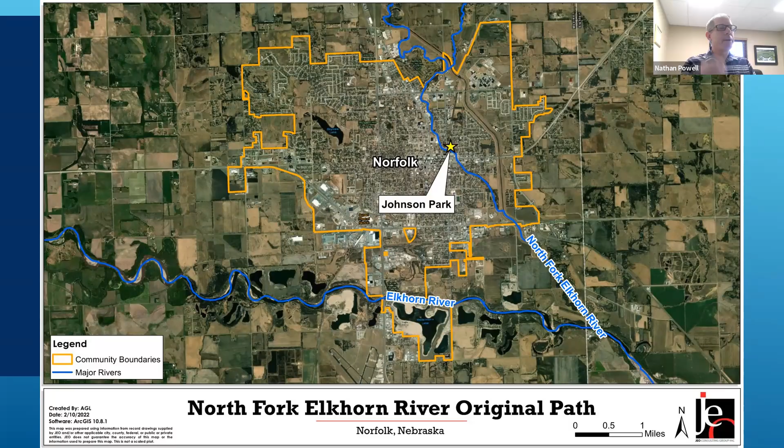The next slide actually shows you what that looks like. There's a little river dam for the grain mill, and they had the diversion mill as well, where they had a little shop and post office. Then the oxbow developed into Johnson Park over time.

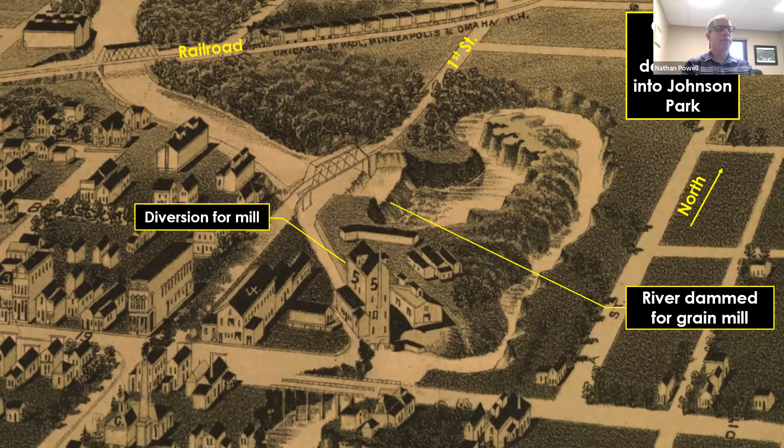In the 40s, after the development of the park, we did see flooding in 1944 and again in 1962, where water spread a mile and a half wide. In 1962, we had 90 city blocks flooded. So from that, we started working on flood control, and this occurred in the 1960s.

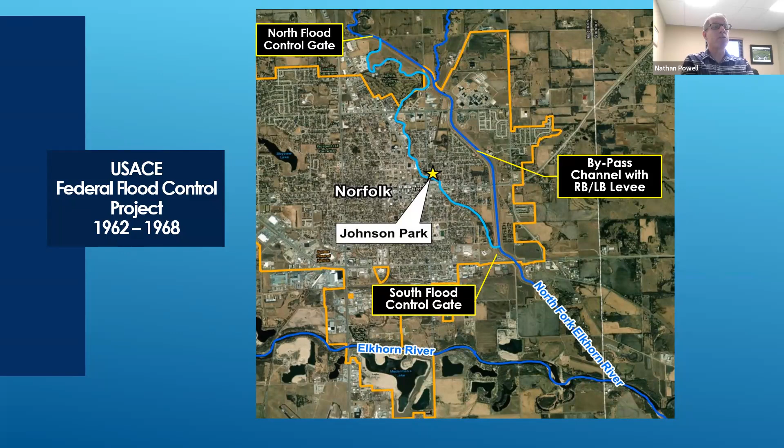We had a flood channel installed in the 1960s. There was a north flood gate control to allow water to still flow through town, and a control gate on the south end to keep water from backing into the community. So we maintain the water flow through town, and when it gets above flood stage, we divert that water. That's what made this possible for the Whitewater Park - because we control the water flow going through town, it really helps us control the recreation aspects of the Whitewater Park.

So we can look at some previous site conditions. These are right before construction. Over the years, this is what developed - the river did end there right at First Street. The river continued, but that's where the river trail ended. People would get off there and float down in an inner tube, but that's where it would stop. There were no whitewater features at the time before construction.

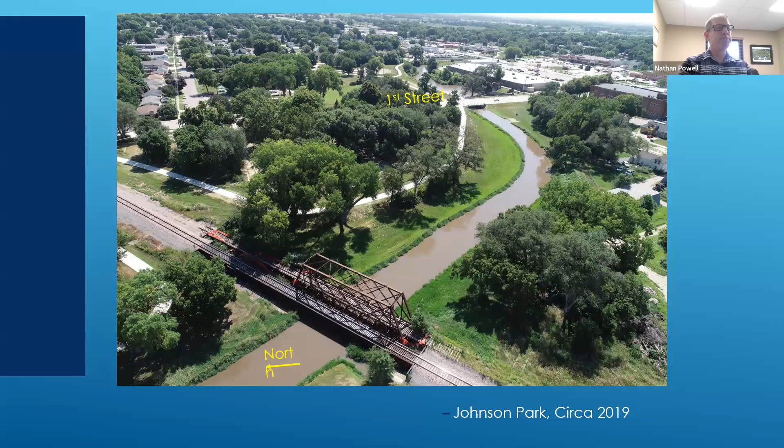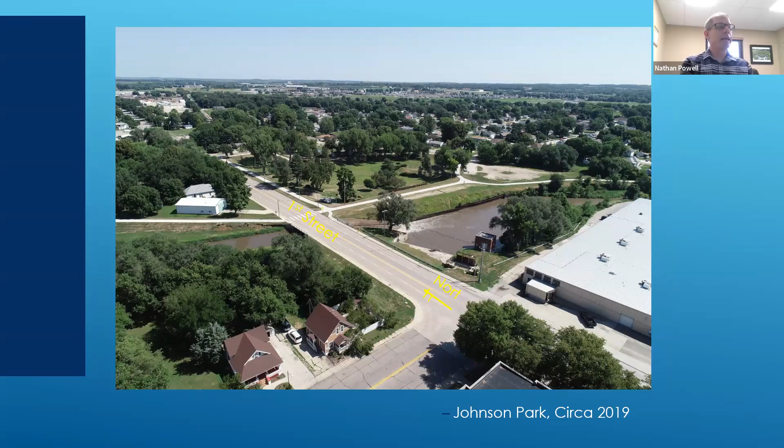Again, another look at First Street - you can see there was a spillway there right after First Street. Most of the inner tubing ended right at First Street. Here's another view from the south end, looking at that spillway. What you're looking at there is Johnson Park.

There was some trail development that had occurred prior to this. Most of that stayed. The trail on the straight section was actually removed because we removed that dam structure from Johnson Park to allow more flat surface going into the river, as you will see later on. But most of the other trails did stay as part of this project.

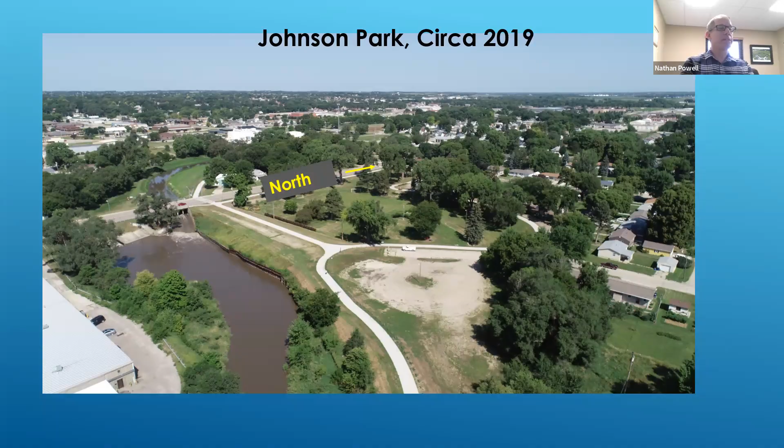If you look on the left, you can see the original spillway prior to the improvements we did for the diversion for flood control. We added the spillway on the right during that 1960s project. You can see from the original photos we looked at earlier that the dam structure is still there in these photos prior to our construction.

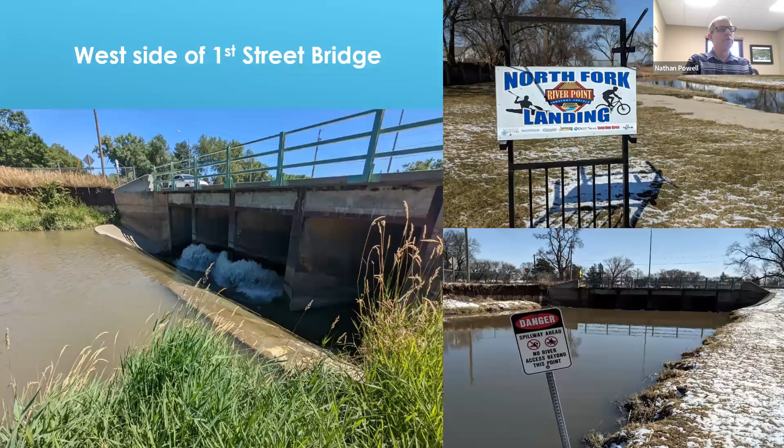Some more pictures. We did have the North Fork Landing, as it was called. That's where people did some tubing in the river for about a mile and a half before they hit First Street, and that's where they would get out, right there at First Street, prior to that danger sign.

Tubing has been going on since the 90s. They started doing some tubing in the late 90s, early 2000s, for about a mile and a half prior to that spillway.

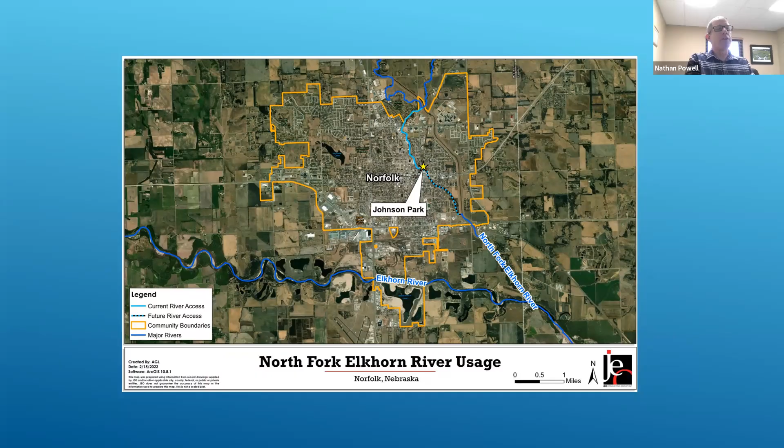So project background and the master plan process. We looked at what this project was for, and ultimately it was to reconnect people to the river. We wanted to reconnect the river to the park as well, because there was a separation when they did work in the 1960s to divert water and stop some flooding. They ultimately cut off Johnson Park from the river, and we really wanted to open that up and connect the river back to the park as part of the experience.

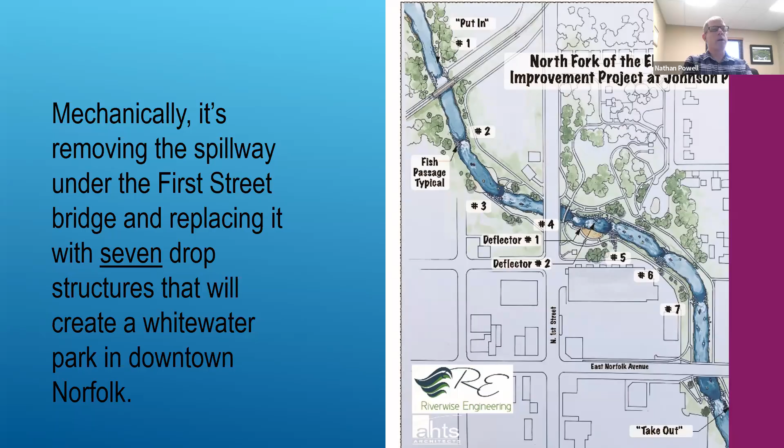Mechanically, it's removing the spillway under First Street, and that's what we wanted to do. That's part of the project, and to connect the Whitewater Park with downtown, since downtown is right nearby.

So we go back to 1974, when the master plan started for the Johnson Park project. In the early 90s, the riverfront development concept was revived. We had some visionaries who visited the river walk in San Antonio, and brought that concept and idea back to our community, starting the conversation in the early 1990s.

In 2008, renewed interest came for the Riverwalk through public forums. A development group was formed, and they raised $86,000 to hire a design firm, HDR Engineering, to help start the master planning for the project.

In 2009, more interviews occurred, and we had public tours to help visualize future development. In 2011, the National Park Service granted an award for planning river recreation, introducing the concept of the river as a recreation trail. Again, we were able to add another mile and a half onto the river for a full, all-day experience.

In 2015, there was a $500,000 grant awarded for the Johnson Park River Trail, and they also closed Nebraska Avenue and added landscaping, allowing us to do some new trail work.

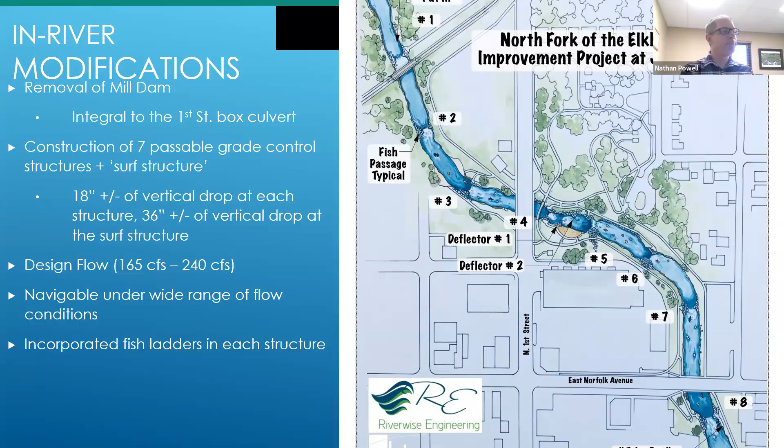We've also done fish ladders as well. As you can see in the pictures on the right, that's an 18-inch drop, and for the kayaker it's still a great experience. It's great for the inner tuber too, so this is great for canoeing, kayaking, tubing, and shoreline viewing. We also do safe passages for aquatic life, which we'll talk about shortly.

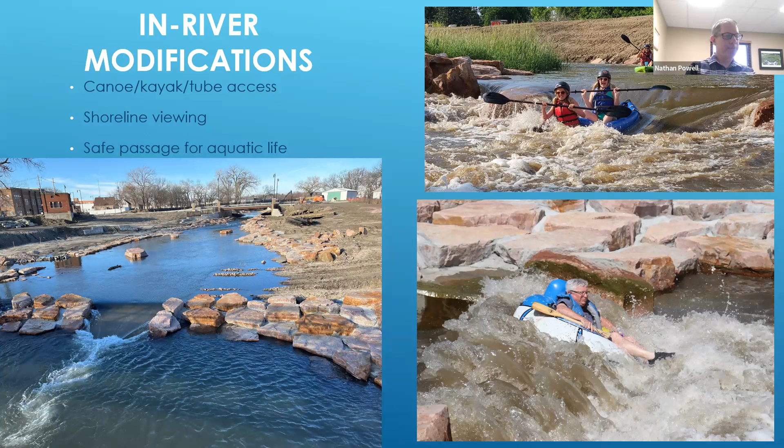Park features that were part of this project: we did an updated playground, a modern playground and also a nature playground. So we had two separate types of playgrounds, the traditional playground and also a non-traditional playground, which is nature play.

We did some new picnic shelters, an amphitheater structure for festival space, and installed a sports court that is also a refrigerated ice rink in the wintertime. So we do have year-round recreation happening in Johnson Park, which in the past we did not have.

We also did trail lighting throughout, which is new to our community, to allow safe access for trail use in the evenings for people not only recreating, but also getting to and from work.

We also did a water feature with a fountain as well. We did some trail connections, and we have two pedestrian bridges, which we'll show you shortly.

We have all-season restrooms. We've done two restrooms within the park for different spaces: one for the winter and playground space, and one for the whitewater park. We also improved our parking lot access, with more parking spots and a bit of off-street parking instead of on-street parking for safety.

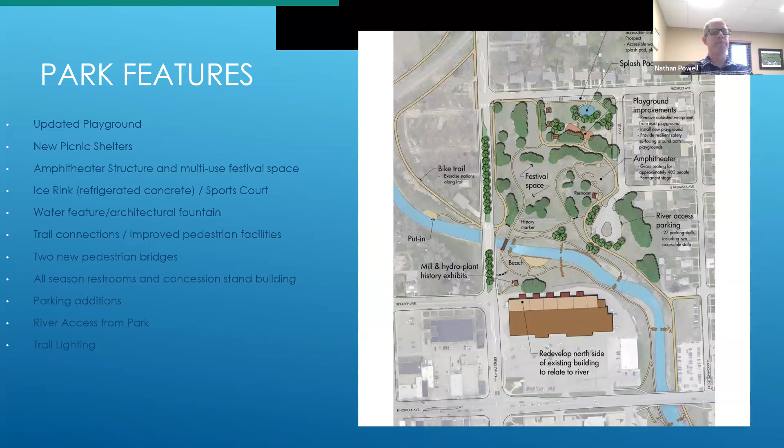In our implementation plan in 2019 and 20, including phasing of individual improvements, we did the funding strategies, permitting for in-river improvements, conceptual design, and coordination with local and private stakeholders. We didn't necessarily have all the funding to complete the project at the time. That was going to be ongoing as we worked through the project to determine what amenities we would have and what amenities we wanted to hold off on.

The Johnson Park implementation plan included the First Street Bridge, roundabout, and river work as phase one, starting with the bridge project. Phase two was the parking lot and the restroom. Timing differed based on designing and also funding.

As funding came in, the phases would start up. Phase three was the Johnson Park and trail projects, and phase four was all of our additional park features. By separating phase three and phase four, we saved over $1.5 million rather than having one contractor work on the project. Some city staff worked on those additional park features in-house to actually save money on the project.

The First Street Bridge and roundabout included culvert removal and replacement with the bridge, in-river improvements as well, which you'll see shortly, and First Street and Braasch intersection improvements. We also did some road improvements along Braasch Avenue prior to this project, and then the restroom and parking lot construction improvements on Oak and Nebraska.

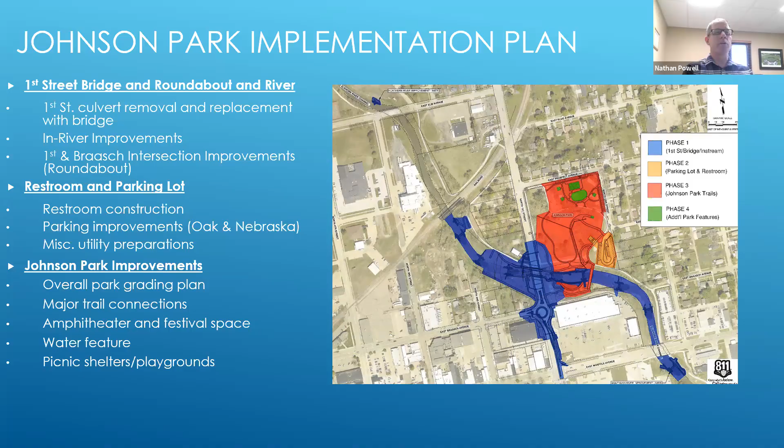This is kind of a timeline. In 2019, we did some design and permitting. We had some construction awarded in 2022. More park design was occurring, even though we started some of the phase one improvements, which would be the road improvements as well—that had already started.

The parking lot and restroom construction had started, and then we eased into phase two in '23, and phase three in '23 and '24. Final landscaping occurred in 2024.

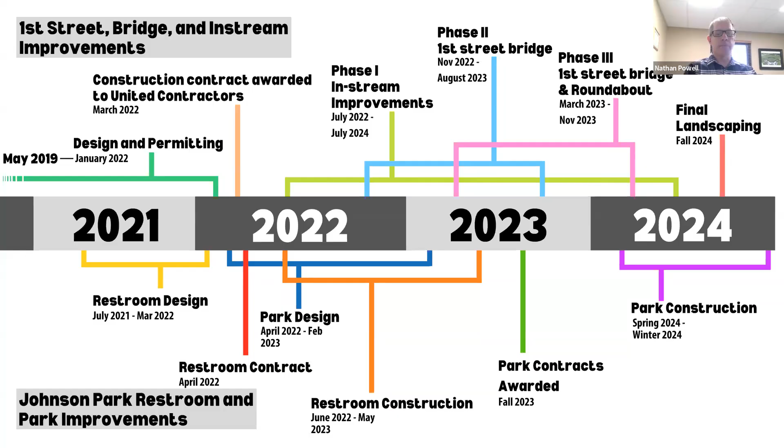We were able to open up the river in late '23 while we worked on our park improvements, so people were floating down the river before the park was done. We were excited to open that up to have an extra season of people enjoying that river, and we'll be able to look at those numbers shortly.

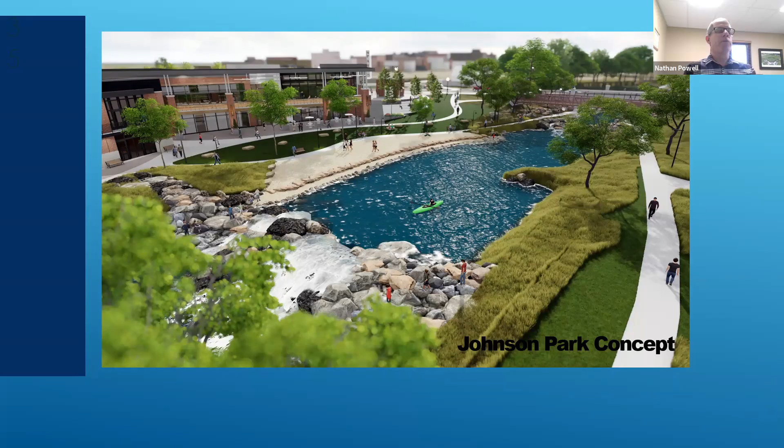As you can see, there's a beach area. We have trails throughout, and we did a lot of tree planting. We planted over 100 trees in Johnson Park as part of the improvements we made within the park.

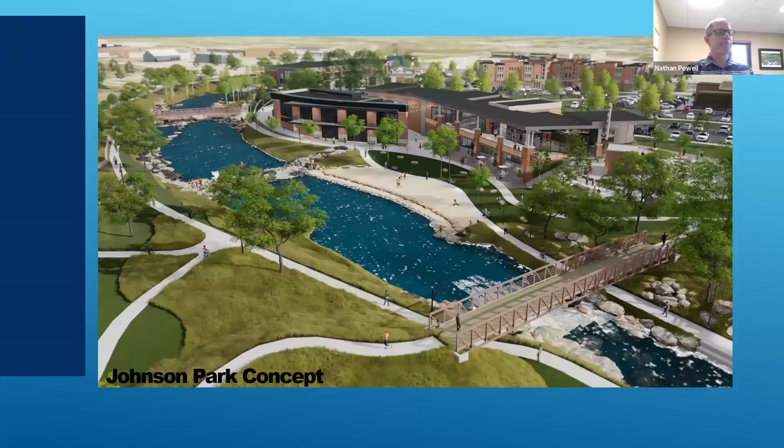As you can see in this picture, we have two pedestrian bridges. We have one on this side, and we actually moved an old railroad bridge for the second one. We'll show you that here shortly.

This is another view looking south from the north end of the park. We have the off-street parking, new playground improvements, and the fountain. Again, trails throughout.

The trails all lead to a center point in Johnson Park, and they head out east of the park, to the north, to the west into the community, to the northeast as well, and then to the downtown area. So it's a central hub for our community. Most trails lead here, and then you move on to the other destinations you're heading.

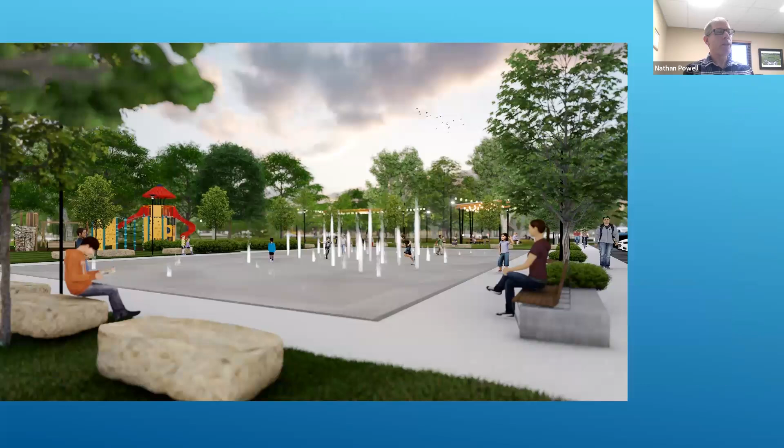Just another picture conceptualizing our fountain project and our ice rink.

Now we'll get into the design structure of the surf feature. We combined structure 1 and 2 to create the surf feature, because you needed that drop to actually have surfing. It's a live surfing wave you can surf all year long. We do have people surfing and kayaking in the winter months if it's not iced over. We've had some pretty warm winters, so the last couple of years it's been open, and we've been able to see people actually using it in the wintertime.

As well as the new park, we had seven drop structures total, including the surf feature, and those were all designed and built all the way down through Norfolk Ave. It's about three-quarters of a mile of drop features out of the overall 2.6 miles of the river, so they're all within three-quarters of a mile.

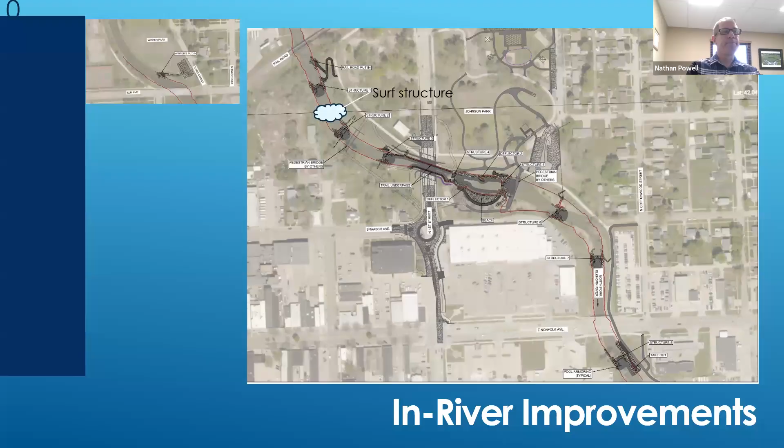These are different put-in and take-out locations for the river. We have the First Street put-in, which we're still working on improvements for. We want to move that across the road. We have some land up there that we're leasing and hopefully would like to acquire at some point down the road.

We have maybe a spot in our put-in for about 10 cars, but we're seeing 40 cars parked up there. So we're expanding that space, going from a quarter of an acre to 6 acres of land available to us.

Winter Park is another put-in if you want a shorter float through the river, or if you just want to go down the features, it's a great put-in for that. Johnson Park would be the first takeout after the whitewater features, and if you want to do the full float, you'd get out at East Bluff Park.

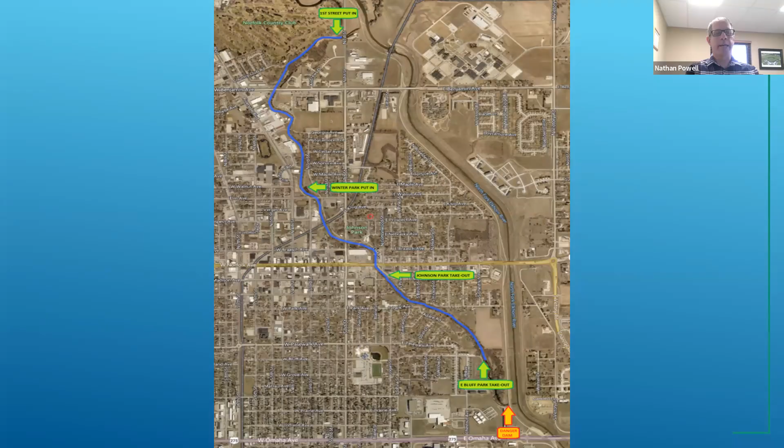East Bluff Park has been recently designated as a park since we've opened up the whitewater park. We did have to expand some parking there. We already owned the land, but we had to create additional parking because we're seeing so many people use the river.

We're also able to monitor the flow. We have different markings throughout the river to determine the flow range, and we can control it with the gates. We can shut it off at the gates and let it flow around the flood control, or we can open it up fully like we have it right now, fully open to keep the whitewater park open. Currently there's no water diverting around at this point because of the dry winter we've had.

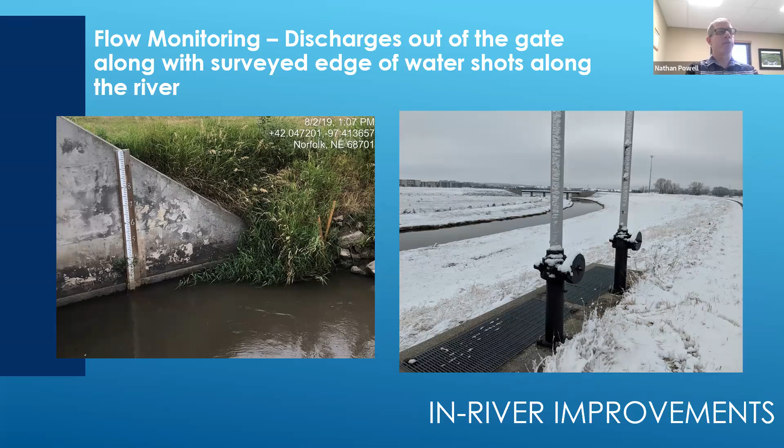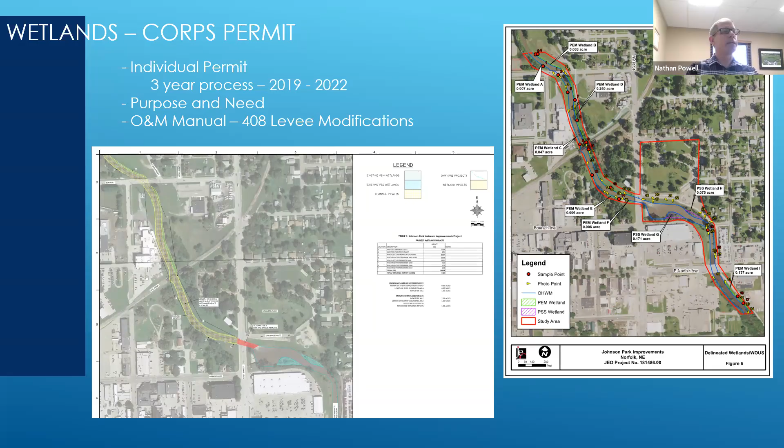Wetlands were part of our design. We are losing some wetland, so we had to do some wetland mitigation. We determined where our wetlands were, and then we were able to install more wetlands on the north end and do some modifications there. This is where we did some wetland improvements north of the whitewater park.

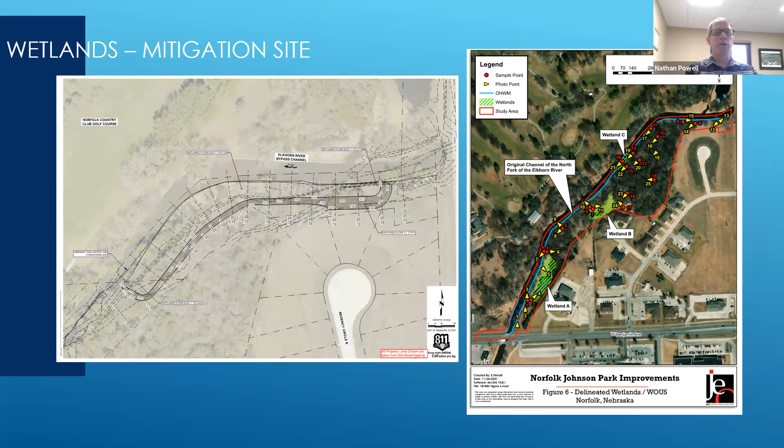You will float through this. If you go in at the First Street put-in, you'll float through the wetlands you see, and it's part of the experience. It's very, very green, you don't even know you're in a city. There are a lot of trees in there, a lot of tall grasses. It's a great experience.

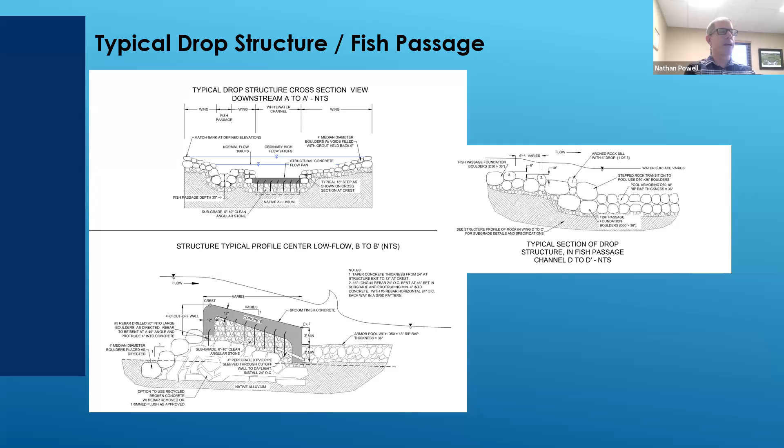The fish habitat is designed for several fish passage and fish-friendly structures. We worked with DNR staff to make that happen. Studies have shown new species of fish upstream of the Manchester Whitewater Park. We noticed that the Whitewater Park improves the habitat for fish, and we expect it to introduce new species into the river because of the fish passages installed as part of this project.

The First Street bridge replacement and roundabout required redoing the road and creating a roundabout to slow traffic down for all the new pedestrian traffic. Most of the trails go underneath the bridge, connecting to downtown as well, so there's a lot more foot traffic. The roundabout has really helped slow things down and provide access to First Street. Otherwise, it would be hard for people on Braasch Avenue to make their way north or south because of traffic.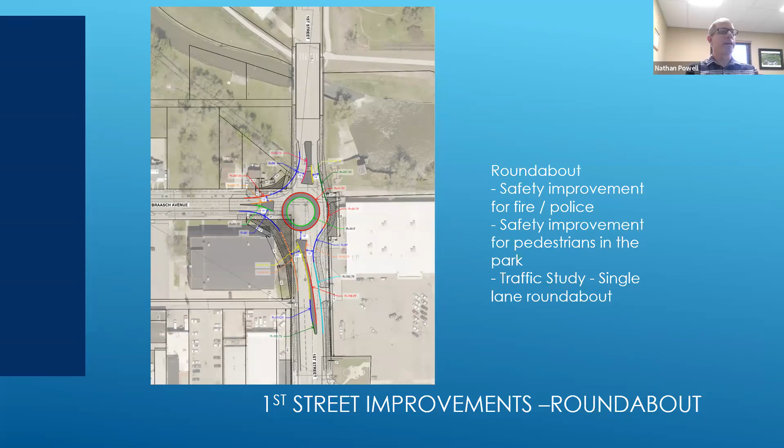On Braasch Avenue, prior to this project, we made improvements along the road, improving the landscape by adding trees, shrubs, landscaped areas, and grass areas. We created some green space along the road, and there was a lot of road beautification as part of that project.

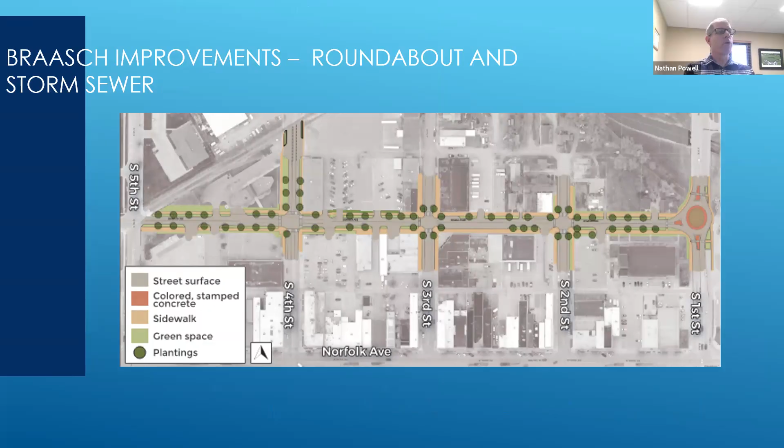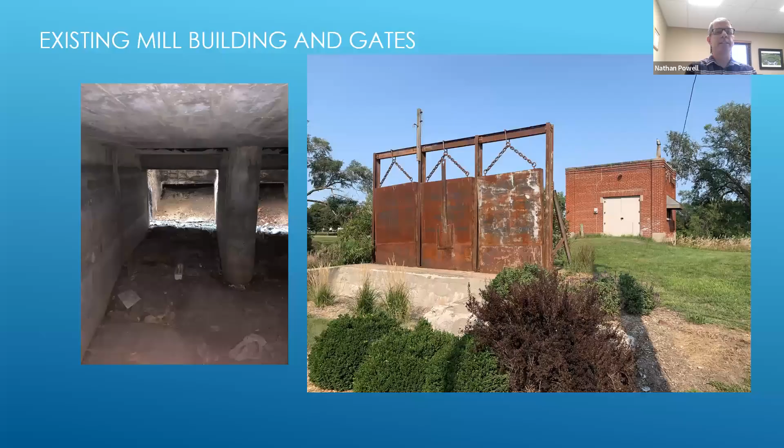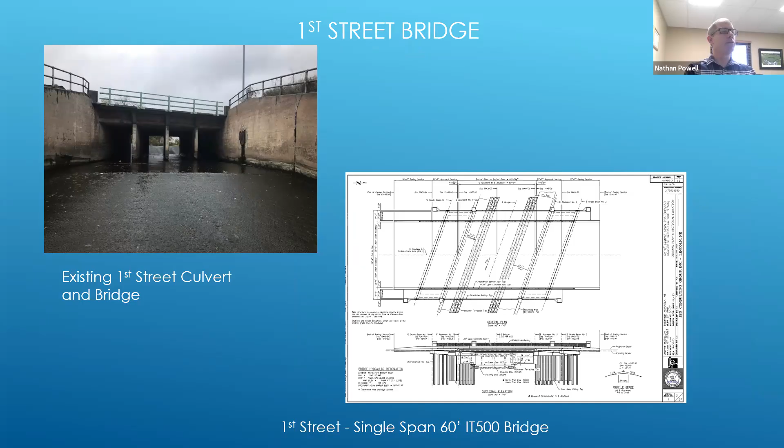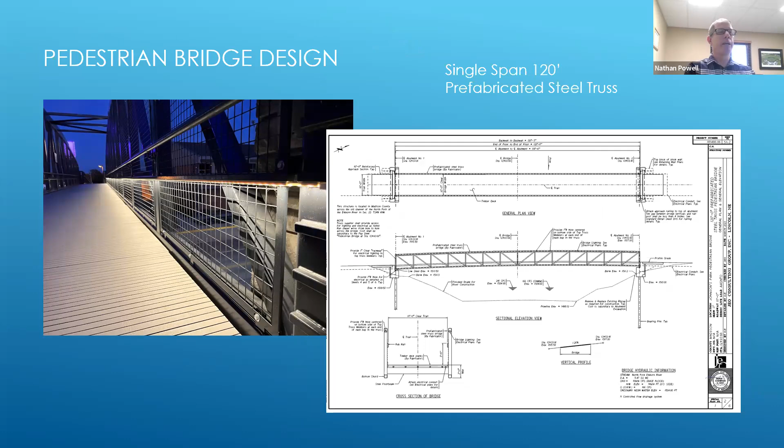The spillway is completely gone. This is a picture of the old First Street culvert that was there, and that bridge is completely gone too, so we'll have new photos shortly. We did add pedestrian bridge design with some lighting along the bridge as well. You'll see that bridge here shortly. It spans 120 feet across the river.

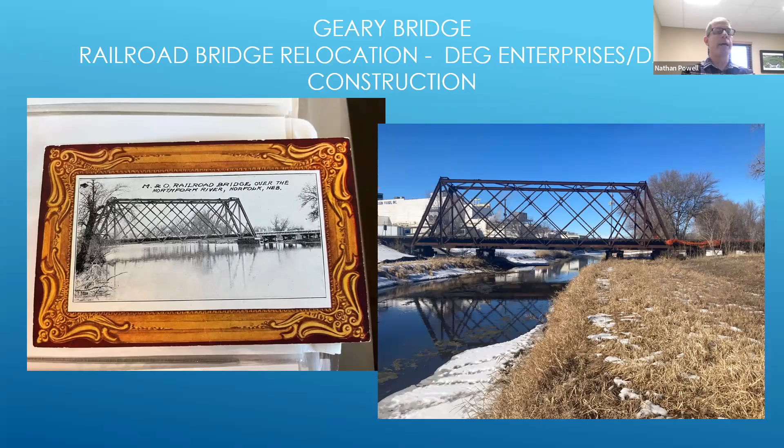We also have the old railroad bridge, which was just north of our structure one. Someone in the local community donated the funds to actually move that bridge and redevelop it as a pedestrian bridge as part of the project.

As you can see here, the red line shows where the old railroad bridge was, and the green line shows where the new railroad bridge is located, or where they moved it. The gray line across, which you can barely see, is another pedestrian bridge as well -- that's the one that spans 120 feet.

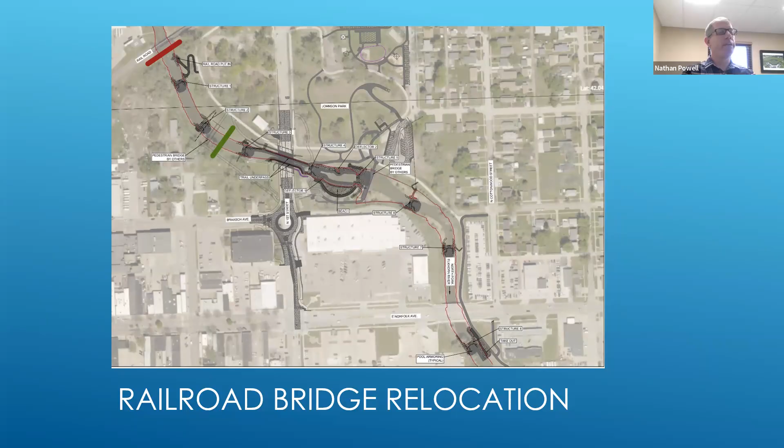The adjacent stream work on First Street included structure 3 and structure 4. It's flowing pretty fast through there, right underneath the road area. We had so much space, but it actually moves the water a little faster through there, so it's great if you're floating through or kayaking -- you move a bit faster before you hit those structures.

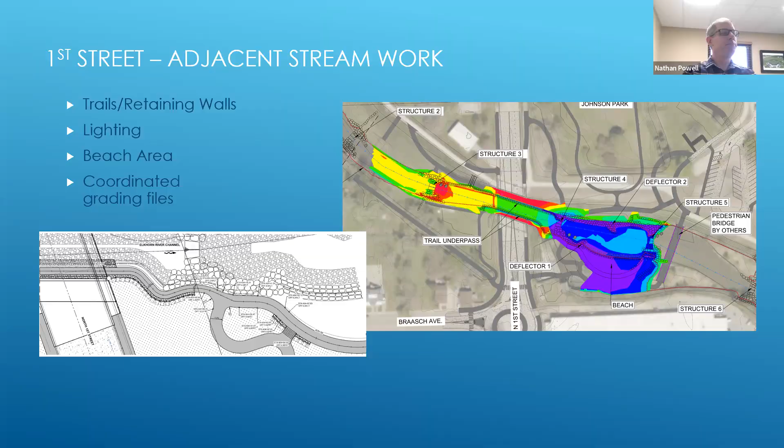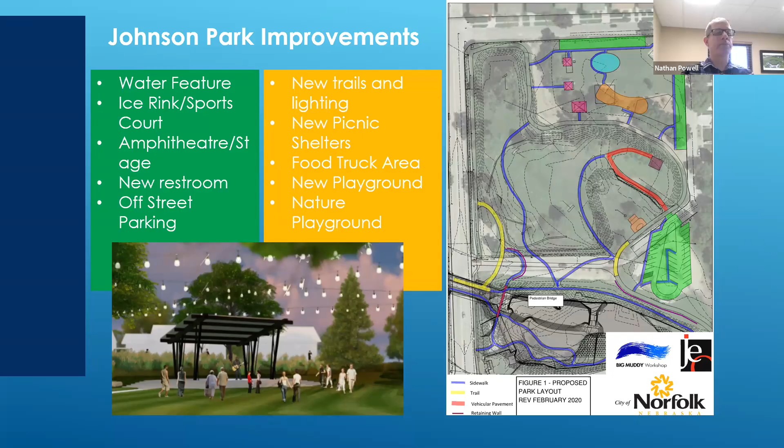This is a look at all the improvements we made to the trails within Johnson Park, and this is an overview while construction was going on. You can see where all the drop structures were going as well.

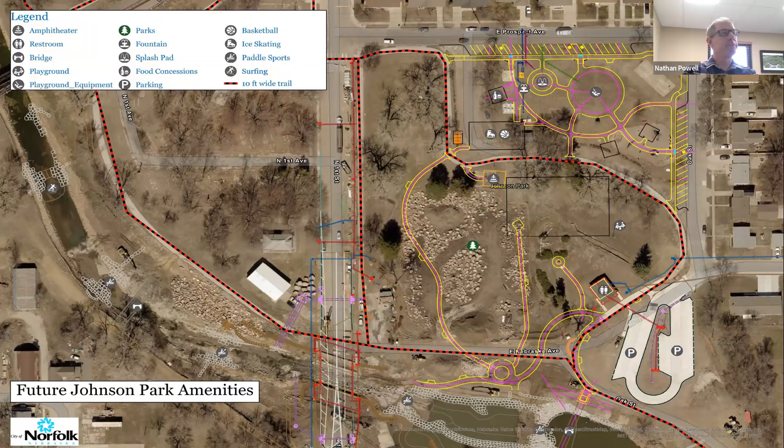And the First Street Bridge -- this is the construction of that bridge, and the in-stream improvements along the river were well underway when that started. Construction cost $8.5 million, and the duration of the First Street improvements and the Whitewater Park went from 2022 to 2024.

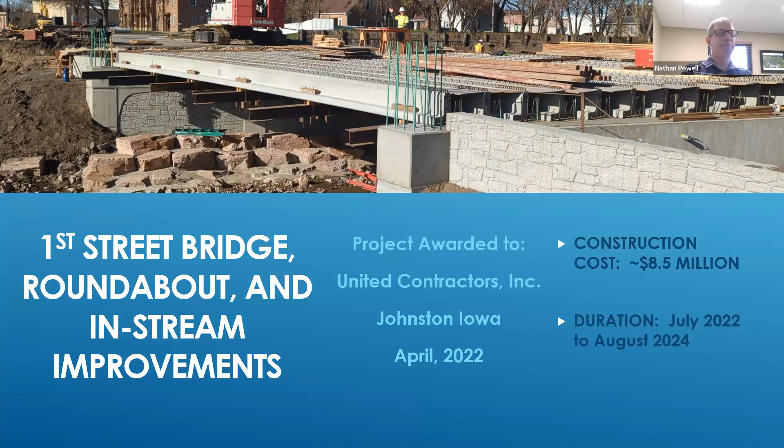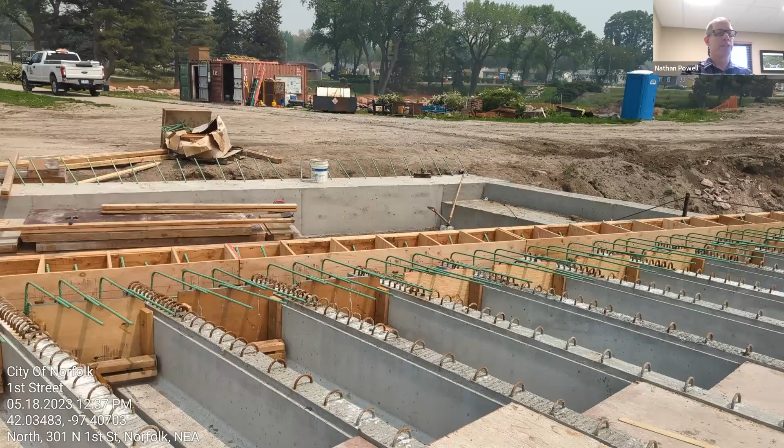We had 15,000 tons of quartzite rock that was hauled in from Spencer Quarries in Spencer, South Dakota. This is rock for the drop structures. You can see they had staging areas for that rock, which had to occur before we could do the park improvements. We timed everything as things were coming out of the park.

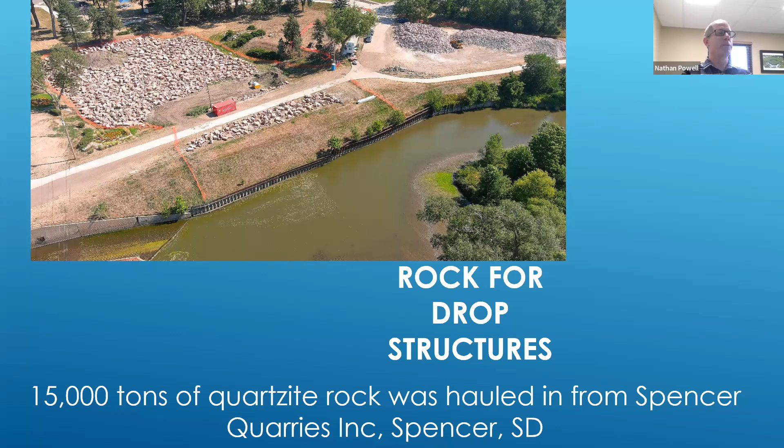You can see they started laying rocks, some of them very large, rocks that were actually hauled in and set with a crane. You can see them setting rocks in the river.

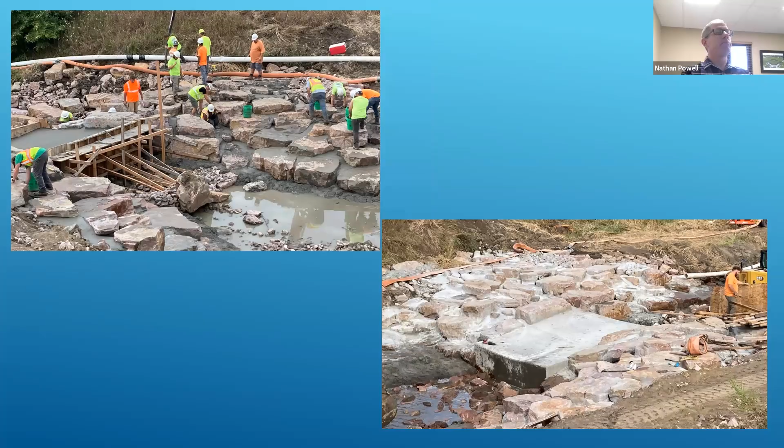This looks like drop structure 6, and we'll have some pictures of that with water flow shortly. You can see the amount of work that went into setting each and every boulder and putting in the concrete work as well.

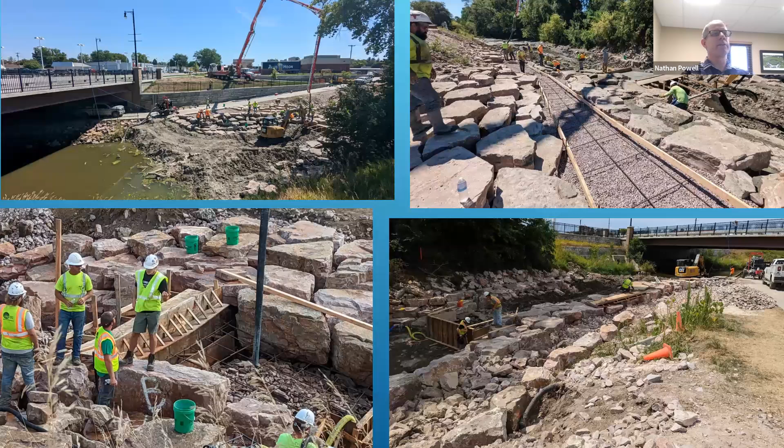Again, more pictures of that work. This is structure 7 on the right, and on the left would be structure number 3 or number 2.

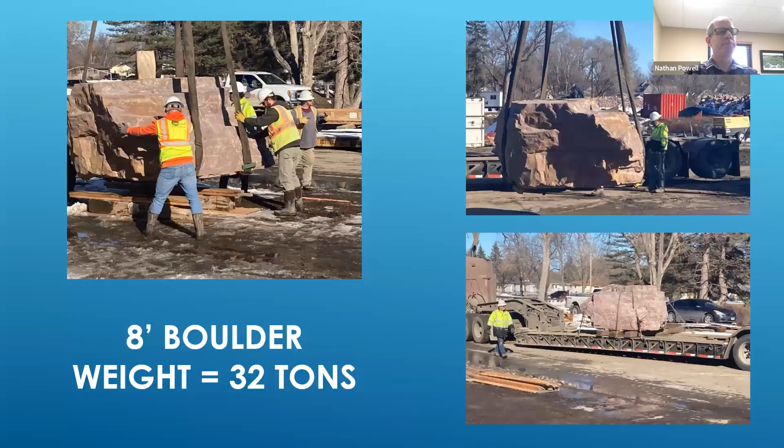Some of the boulders were 32 tons. They hauled them in on a truck and pulled them off with a crane, and set about a dozen of those boulders within the river. You see the tops of them sticking out - those are the big boulders that they set in the river.

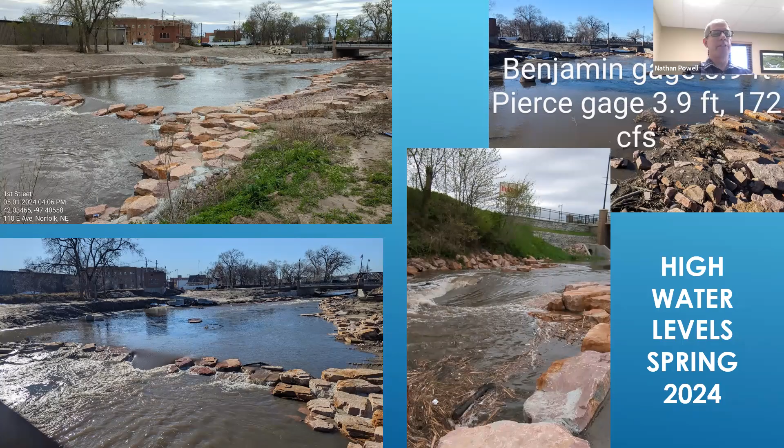This is during the high water levels of spring 2024, one of the highest water levels we've seen in the river. This is where you start closing the gates and keeping that water down to make sure it doesn't overtake the park at all.

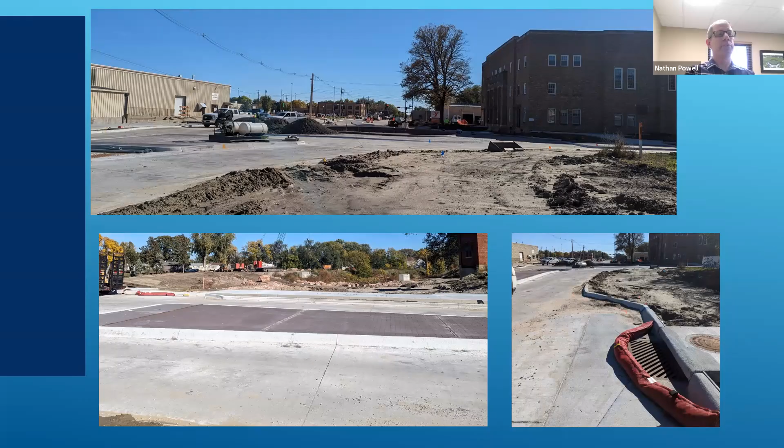More pictures of First Street improvement, getting close to ending of construction. We had to do some storm drain installation as well along that project.

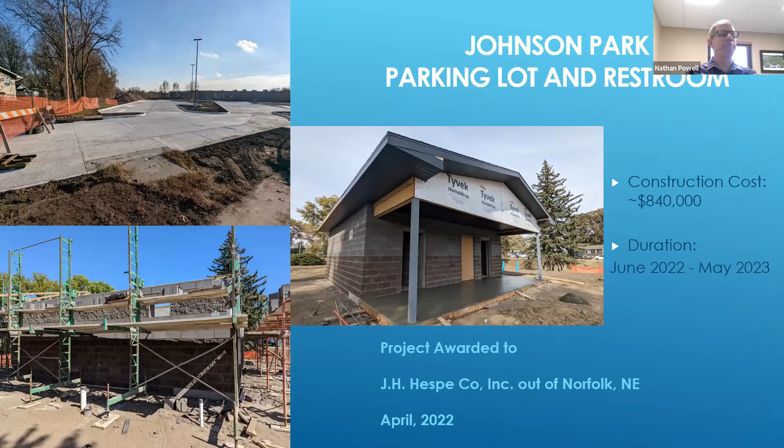The new parking lot and restroom for Johnson Park went in. That construction cost was $840,000, and the duration of that project was 2022 to 2023. More pictures of that restroom.

We did 4 bid packages for Johnson Park. This allowed us to save $1.5 million on the project by doing a lot of the legwork with city staff.

The first bid package being the ice rink and water feature. The second one, upper trails and parking lot. Bid package 3 is the picnic shelters and amphitheater. And 4, park and trail lighting was the 4th bid package.

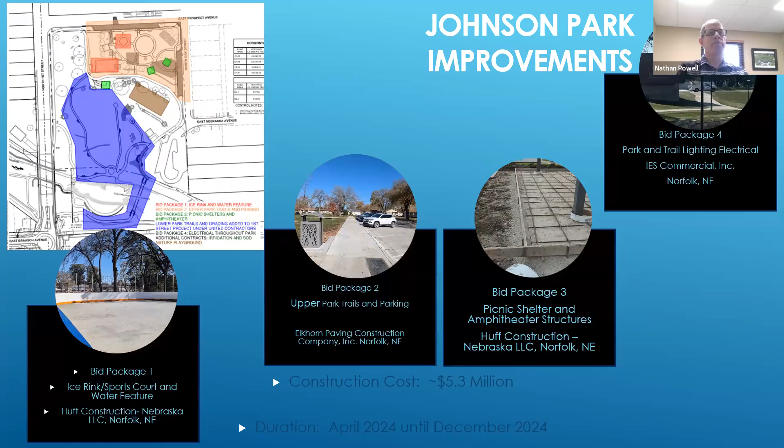We did save money by doing it that way. Generally, you would bid them all together, but we were able to save money on the project to do more features for our project.

This is the construction within the park. This would be the sport court and ice rink being installed.

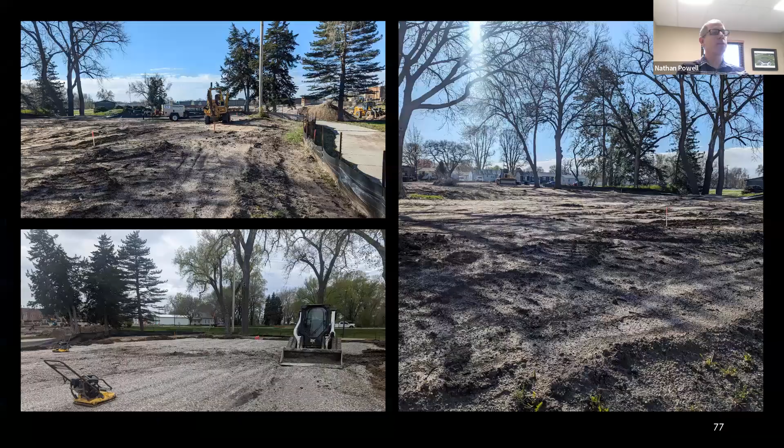Another picture of that, installing all the coolant lines inside the court so we can refrigerate the ice rink and have guaranteed ice all winter. We've been able to open that up at Thanksgiving, and we seem to be closing it down about the first week of March.

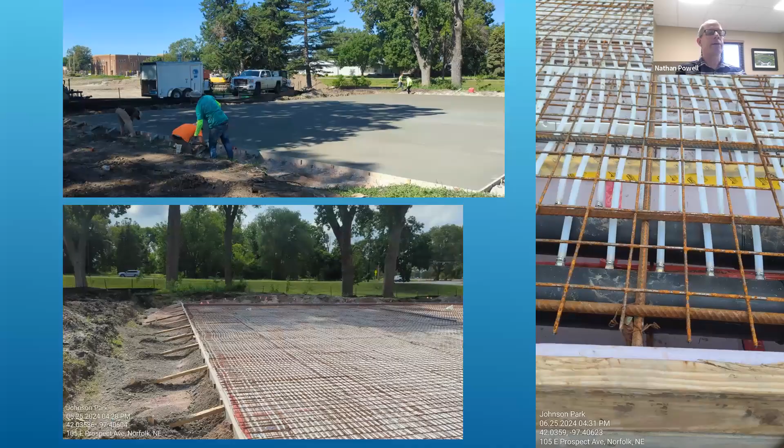New playground installation - city staff installed that ourselves, so that way also to save some money on the project.

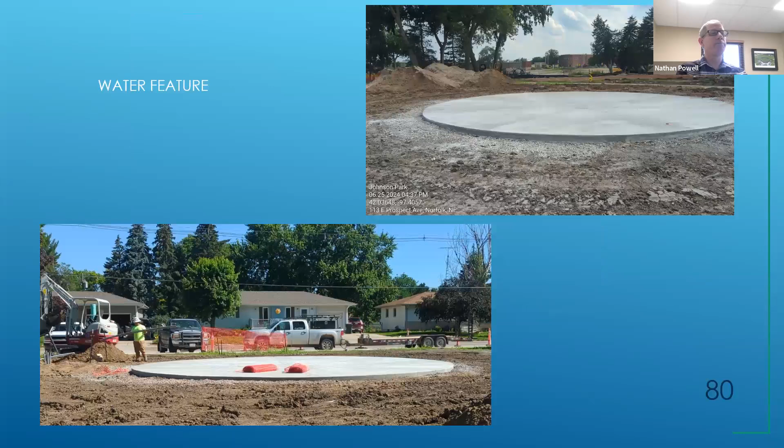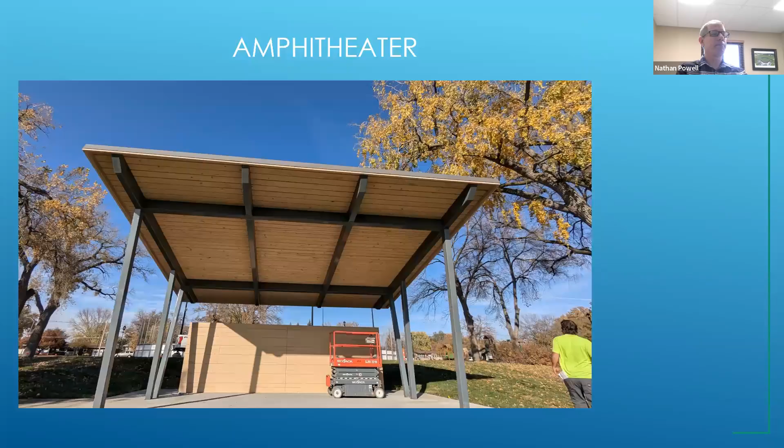This is the new fountain and water feature that was installed. Our new shelters and picnic shelters that we installed in Johnson Park. This would be the amphitheater that was installed.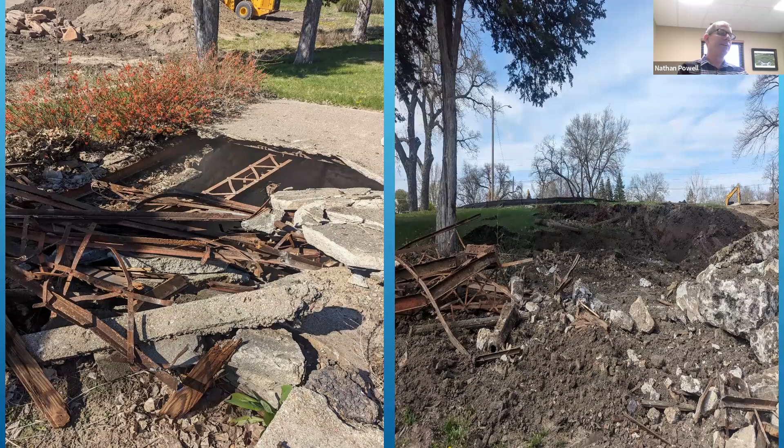During construction, we would find a lot of different things. This was an old bear den that was underground, a hollowed structure that we had to pull out - they used to have some animals in the park back in the day. You can see the big hole in the ground that we found as part of that project.

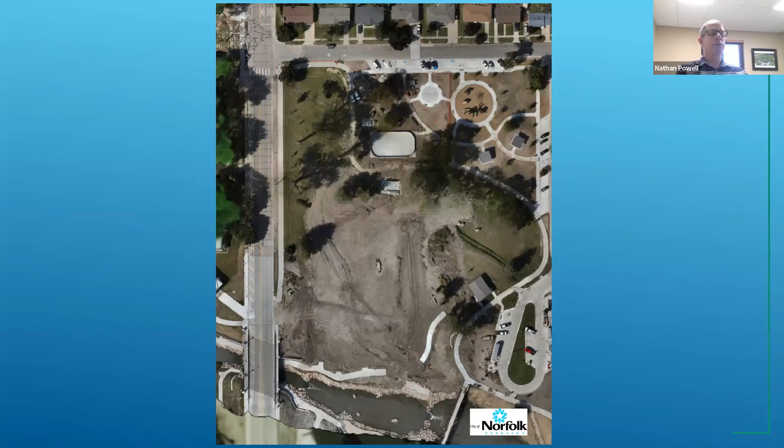This is another aerial view as the project was well underway. You can see the playground was installed, the water feature, the ice rink was installed, and all the rock has been put in the river by this point. We're getting ready to finish up construction down below and install some more trail and also the nature playground.

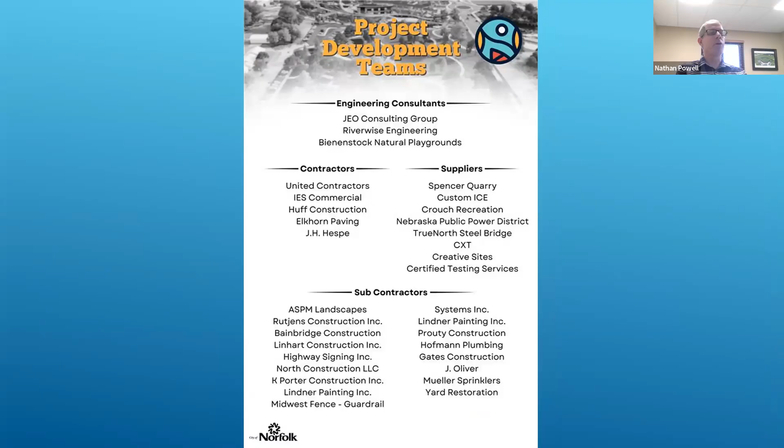So there's a big team of contractors, suppliers involved in the project, and consultants and engineering.

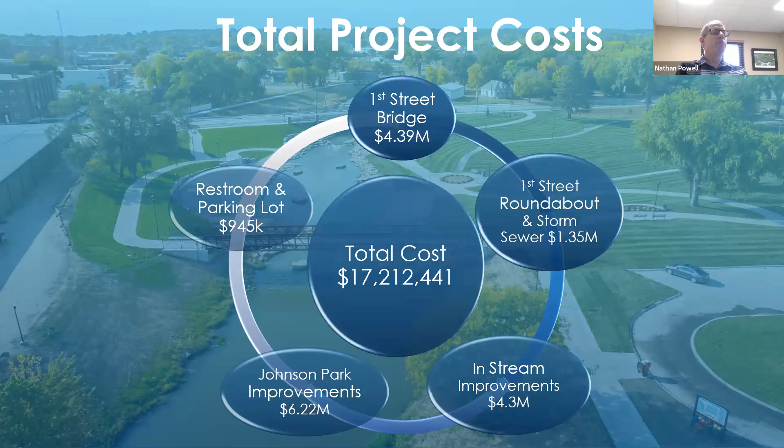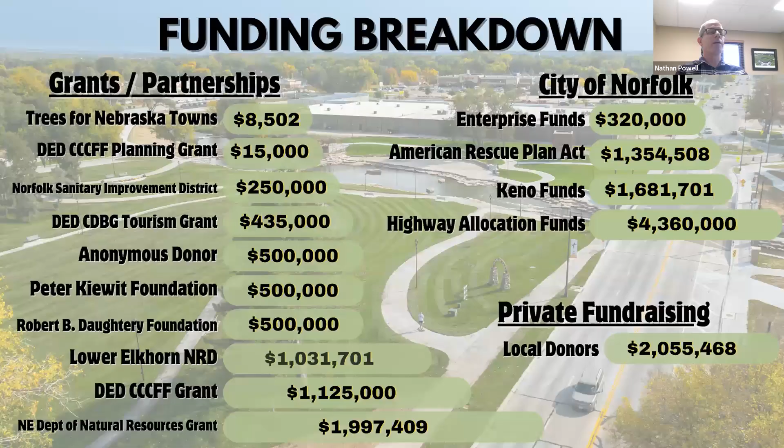Funding here: First Street Bridge was 4.39 million, the roundabout 1.3 million, in-stream improvements 4.3 million, Johnson Park 6.2 million, and the restroom parking lot just under 1 million, with a total project cost of 17 million. We had 6.4 million in grants and partnerships, 2 million in local donations, and then the remaining city funds through enterprise funds, the American Rescue Plan Act funds, Keno dollars, and highway allocation funds.

So the results: prior to 2022, we had 800 river users per year. In 2025 it's estimated we had 9,000 visitors who kayaked, surfed, or tubed in the Whitewater Park, and that's counted by cell phones, so it could actually be more. Anyone who didn't have a cell phone wasn't counted, so these are conservative numbers.

And another 65,000 people visited Johnson Park. So, huge improvement. We also have positive feedback on social media.

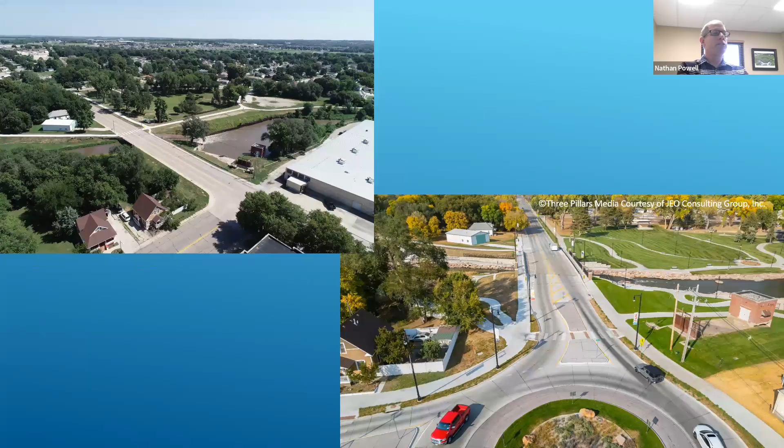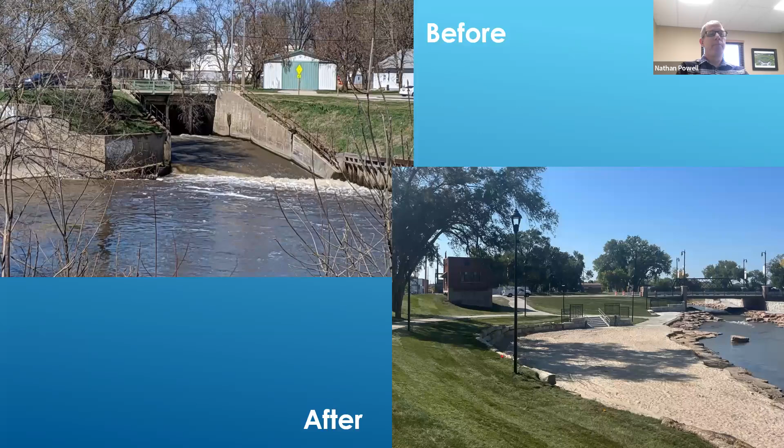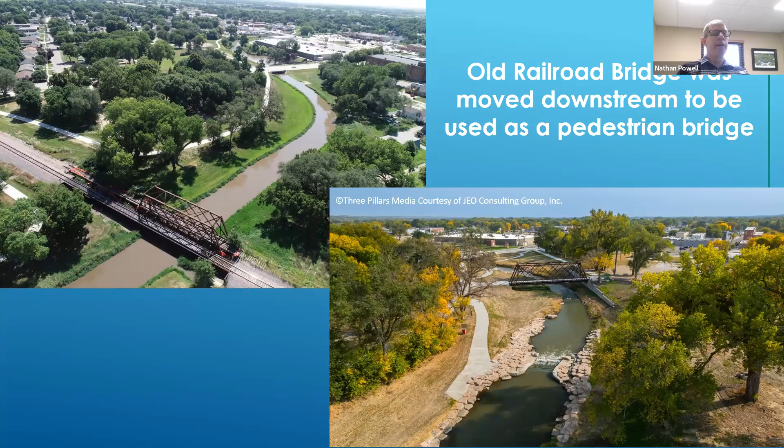And then these are some before and after photos of the same area. You can see Johnson Park on the left, and the new Johnson Park on the right. More before and after photos of the spillway and the First Street improvements. And this is where the railroad bridge was moved. You can see its old location, and the bottom right is its new location, part of the trail system. The feature you see there is our feature 1, which is our surf feature.

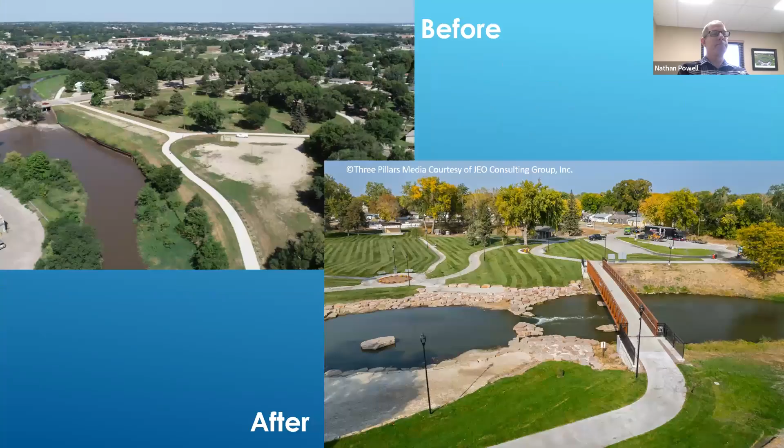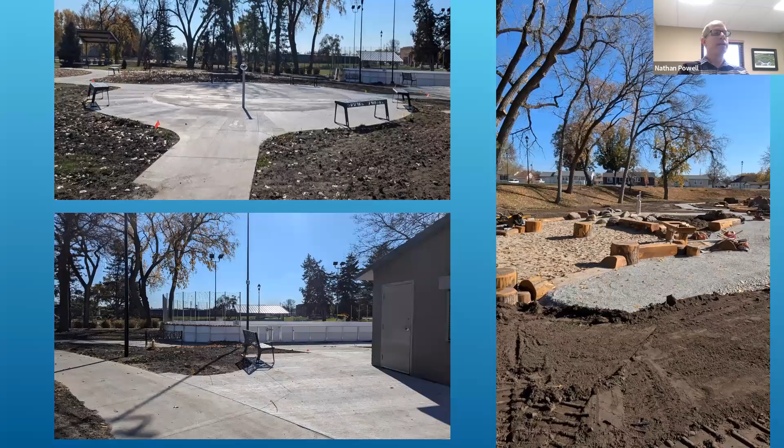That's also the surf feature as well. Some more before and after photos: the new pedestrian bridge, our new shelters, amphitheaters, off-street and on-street parking, ice rink, water features, and our nature playground there to the right, which is a great new addition.

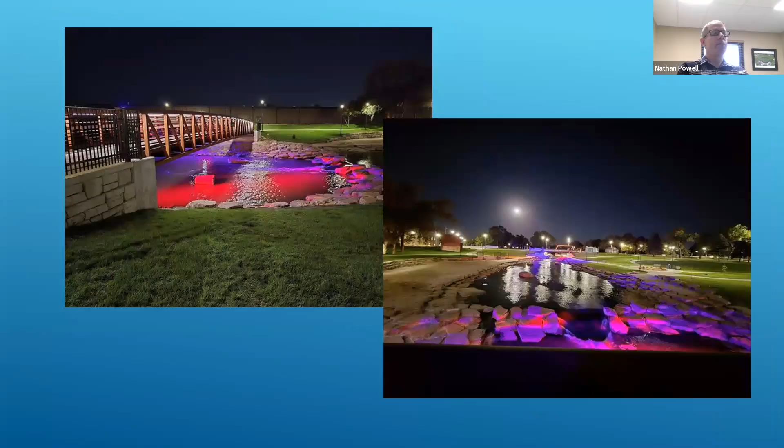We also have lighting at night, so we have color lighting on the features at night. We can change those colors throughout the season, and also the trail lighting throughout. We've added artwork along with a partnership with Nucor and the high school. Our local schools built those art features for the art walk within Johnson Park.

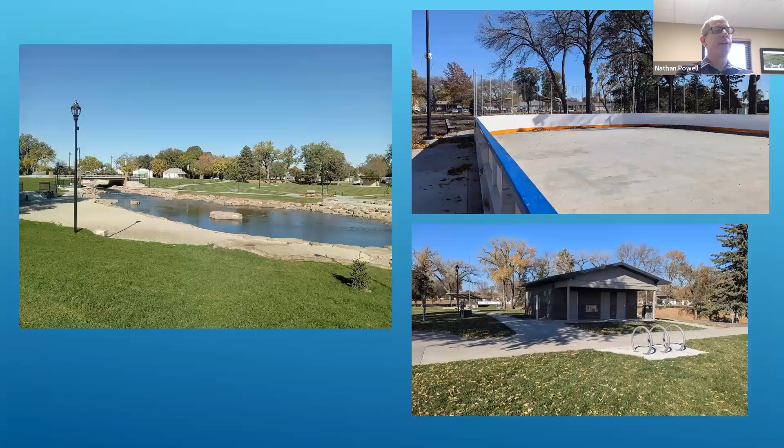More finished photos. As you can see, those drop structures create a great experience for the kayaker, and that 18 inches is a lot when you're on a kayak. Again, that's another view of structure number 6. Some more pictures of it finished, and getting ready here to wrap up the presentation.

And so again, if you have any questions, I'd be happy to answer those.